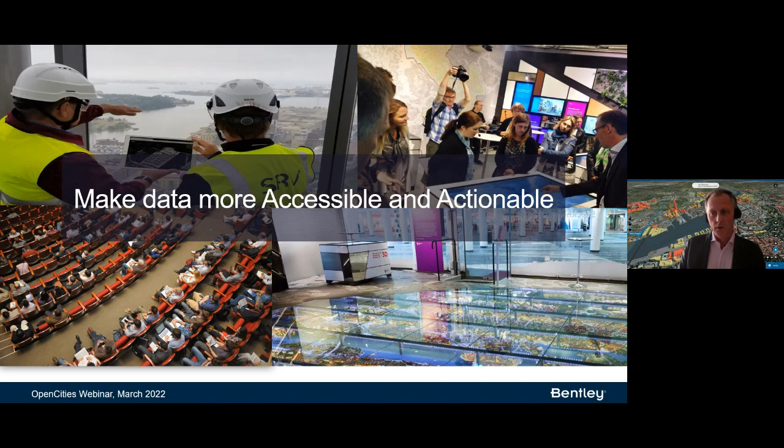So when we talk about the urban digital twin, it's very much about giving this portal, a single view of the operation or the asset you're controlling, if it's a city, a campus area, a smart district, or an airport or a seaport.

To access critical infrastructure data, which could be point clouds for the street or indoor mapping, so indoor scanning of a building, for example, or other types of information.

To also federate data for data-driven decisions, and to implement automated processes and workflows, as well as cooperation with key stakeholders. Next slide, please.

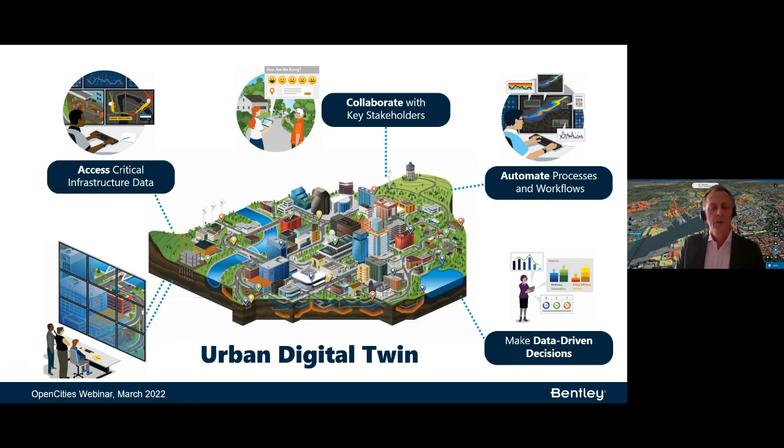So when we talk about the digital twin, it's very much about creating this virtual version of the operation or the area you want to control, not only the GIS information, the mapping information, but also the engineering information.

The CAD models of the buildings, the CAD models of tunnels or bridges, and other assets, but also the associated documentation.

Related to the different components, the analysis, the tracking, etc.

But also the more operational aspects of work orders, maintenance records, and inspection records, as well as the actual status with IoT sensors and feeds, etc.

And we are covering, and this is very much federated in our solution, from different sources in different formats.

So we are supporting common market formats, including also non-Bentley solutions, of course, and IFC and other formats for the BIM models, but also capturing techniques for survey data.

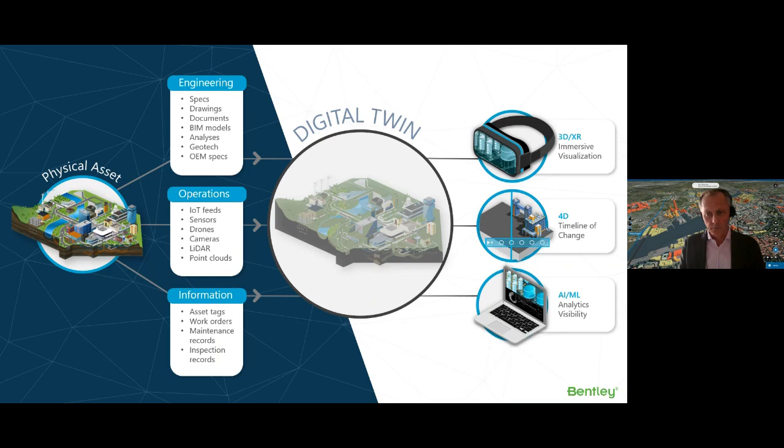So in summary, the OpenCities platform is very much about creating the single view of your city, campus, or asset - the digital version of it. It streams unlimited types of data that you can connect into the digital twin: reality data, GIS data, engineering data, IoT, etc. It's scalable and easy to use and deploy. The user interface is customized to be easy for any user to consume and find data in a nice way, and this is the flexibility we provide with the OpenCities platform.

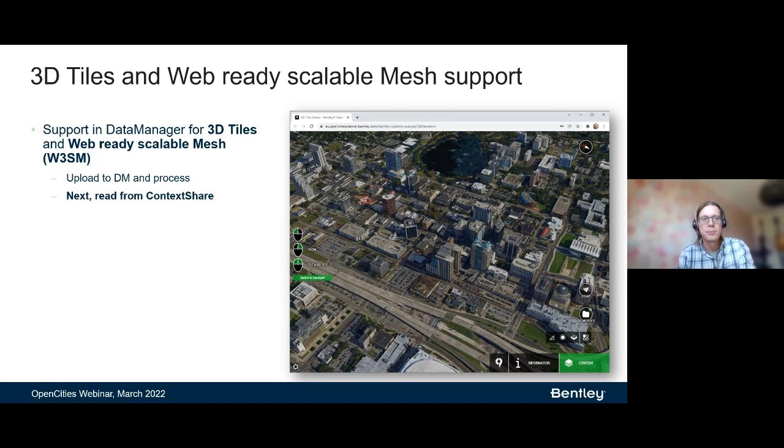Staying in Data Manager, we have added support so you can see what files a source was made from, and also which map data set or sources that this source is used in. For instance, you might use a feature for clipping or masking in another source - this will be listed now if you go to the information section of your source. And of course, you will also see which map data set uses this source. This helps users who have a lot of content within Data Manager and might not be completely certain what is used where and what it was built from.

One major improvement we have done is to implement an ad-hoc workflow to create iModels. This means drag and drop support of CAD and BIM models directly into the editor. Irma will talk more in detail how this workflow actually works later. But basically this is done by connecting one or several OCP projects to a Bentley Connect project. It's still possible to have a pure OCP user experience, meaning you can configure everything from OCP - you don't have to switch to another workflow or user interface, which was the case before.

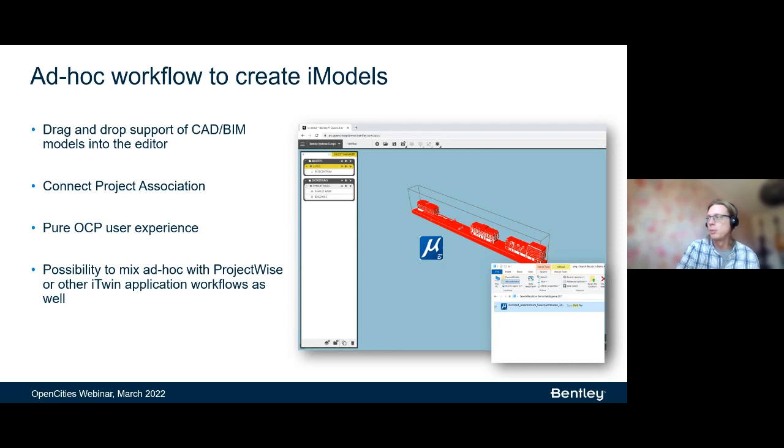This connection to a Connect project also comes with the additional benefit of enabling centralized user management for complex OCP projects. When we look at something like the Sydney Airport implementation, that is a single landing page for the users, but in reality, it's really the sum of 30 or 40 different OCP projects that are connected and linked through landing pages, through portals, and then through projects.

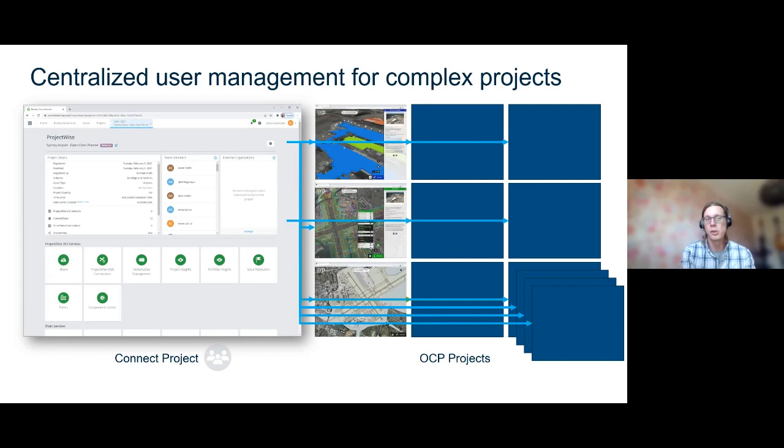The legacy way of doing user management in OCP would mean that if you want to add one single individual to this complete solution, you would have to go into every individual OCP project and add that person over and over again. But what this Connect Project Association enables is that we can take the individual user management out from the individual projects, and instead bring it to the Connect project, where you add and remove individuals who can access things.

You still have control within the individual projects over which group of people can access them, but this is now done through role-based access. You can manage the roles through the OCP interface, or in the Connect project interface. For instance, you can create a role called engineers, and in the Connect project interface, assign who gets to be in this role, then in OCP assign which projects the group engineers should have access to. Irma will go over this in more detail later.

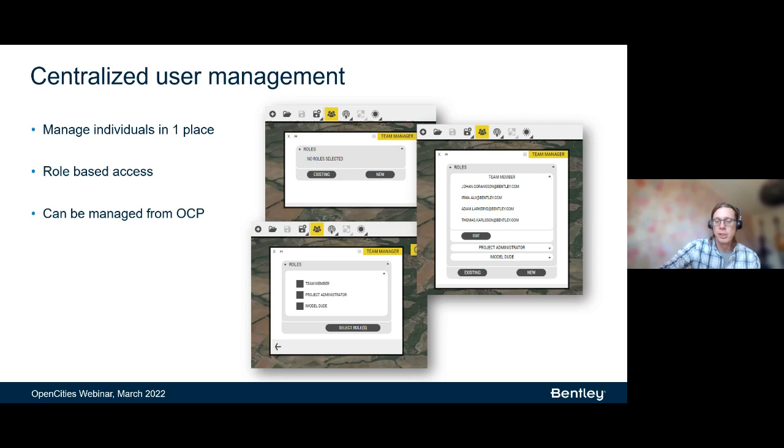So that's the current state. A quick look at things we're developing right now. The ad hoc workflow currently in OCP creates an iModel every time you drag and drop a new CAD or BIM file. We will add support so you can assign or choose which iModel you want to update, meaning you can create a new version automatically, even with drag and drop. From that iModel, you can go back through the versioning, back up a version, and have 2 or 3 different versions simultaneously in OCP, letting the user switch between them. This helps that workflow and enables versioning of the iModels.

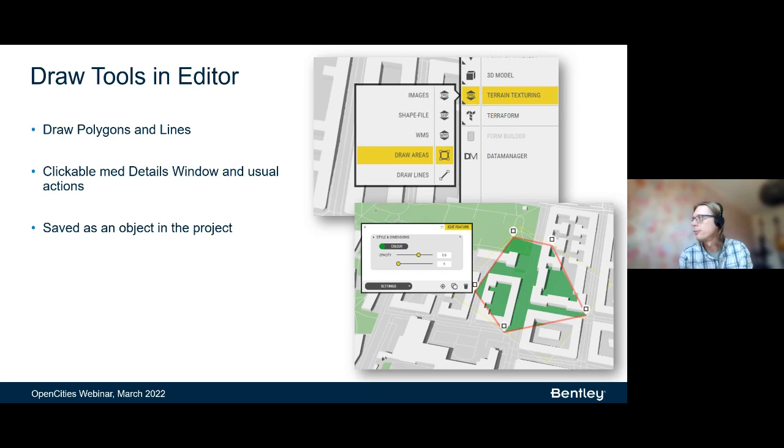Project content will also be searchable. So if you've created a lot of points of interest manually, you can now enable them to be searchable, and this will search the name of the point, the label if you've given one, and the details window content. Same with 3D models and the drawn features I just presented. You can make them searchable without going through Data Manager, automatically, with a simple checkbox.

Some improvements to the TerraForm tool as well. We've improved how the nodes are drawn. We had seen some problems where the way the nodes were presented made it difficult to use the tool, but that's been improved. You can also now add and remove nodes from the polygon that you drew before.

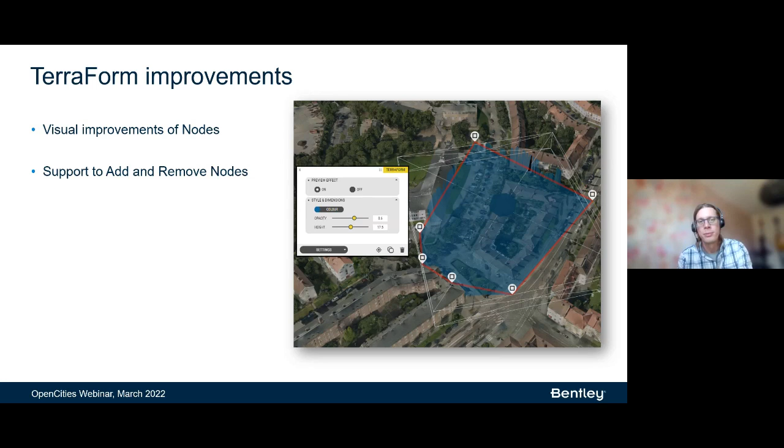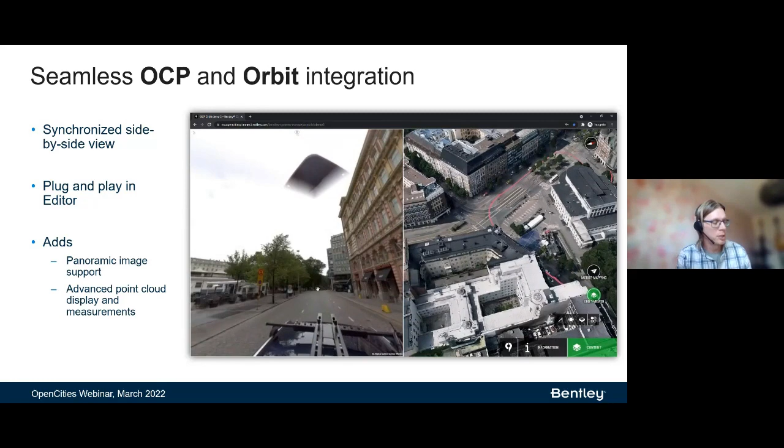Another thing we are working on is a seamless integration between OpenCities Planner and another Bentley product, Orbit. This allows a synchronized side-by-side view with OpenCities Planner and Orbit. Orbit is a tool that does a lot of things, but it manages and visualizes panoramic images like we see here, point clouds, and also reality models.

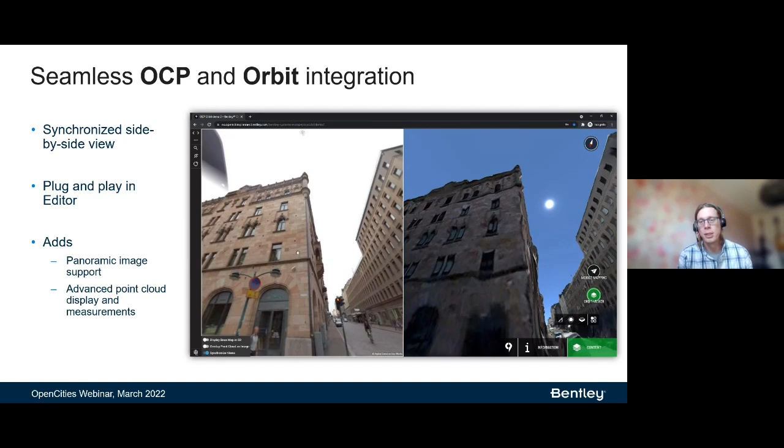It has more advanced measurement tools and annotation tools than OCP. But with this integration, you can now get the best of both worlds. It's going to be plug and play in the editor, so no scripting. You just pick the Orbit publications that you have access to.

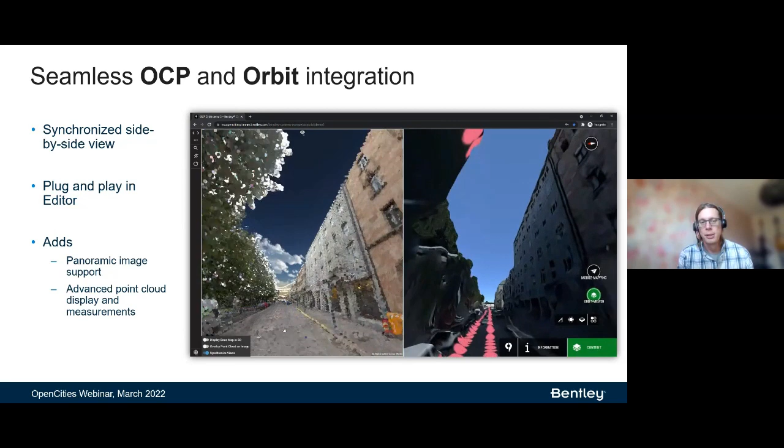You add it to a layer button in OCP, and this is the end user experience. I think this is adding a level of data support that we don't support, or didn't support, in OCP standalone. It's really a synergy effect between these two products now.

That's it for me, and I think I'm going to hand it over to Irma to dive deeper into the iModel and user management workflows. Thank you.

Hi everybody, so I'm just going to share my screen. I have a video prepared, and I'm going to go through the workflow of how to add iModels to OCP. But before we dive into that, I just wanted to briefly bring your attention to something that was mentioned in the beginning of the webinar, and it will be mentioned again at the end. So I'm talking about the newsletter.

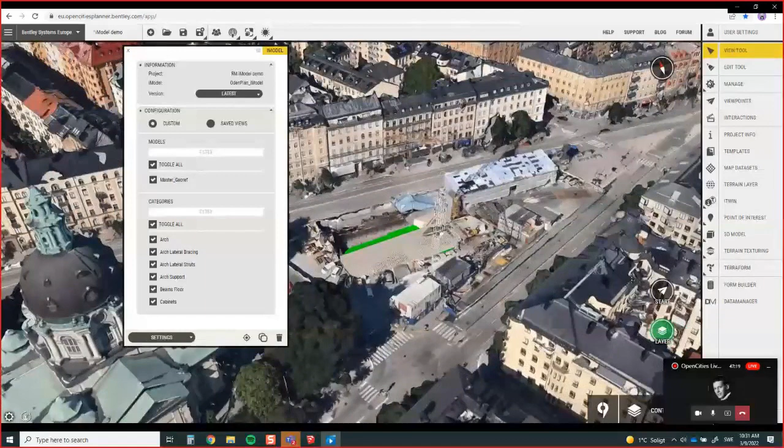And we get this settings window - I'm guessing you have seen that before. Navigate to object, pretty standard button so far. You get the list of categories or layers and the list of models that are inside of this iModel. Just a quick reminder, you can of course have 15 Revit files in your iModel if you want to, and these will all be listed here.

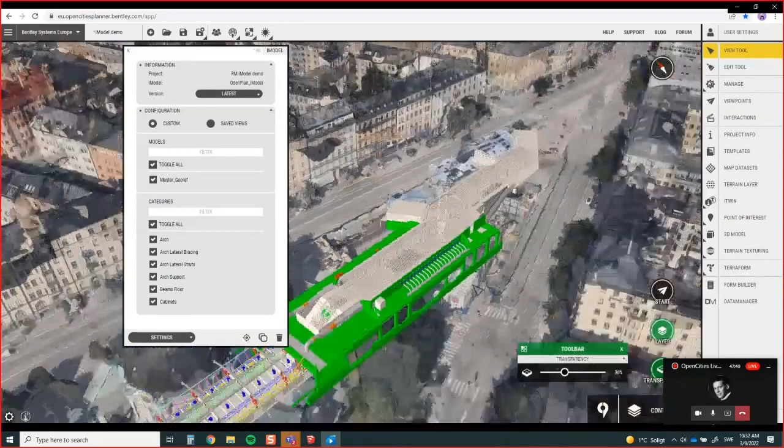Okay, so I'm showing that the iModel has been added here, toggling the transparency to see what it looks like underground.

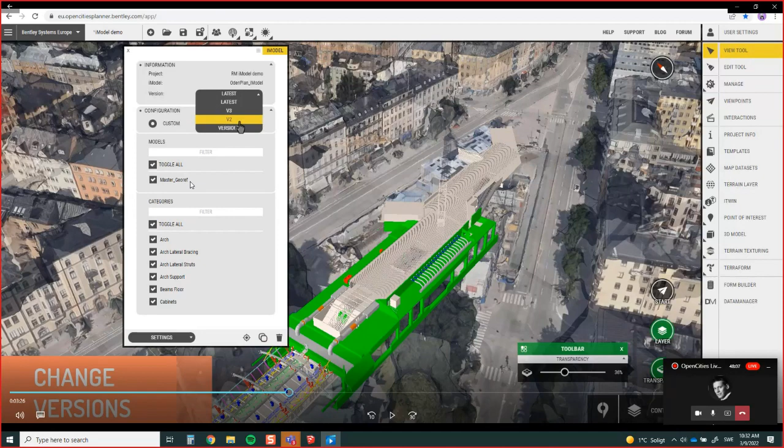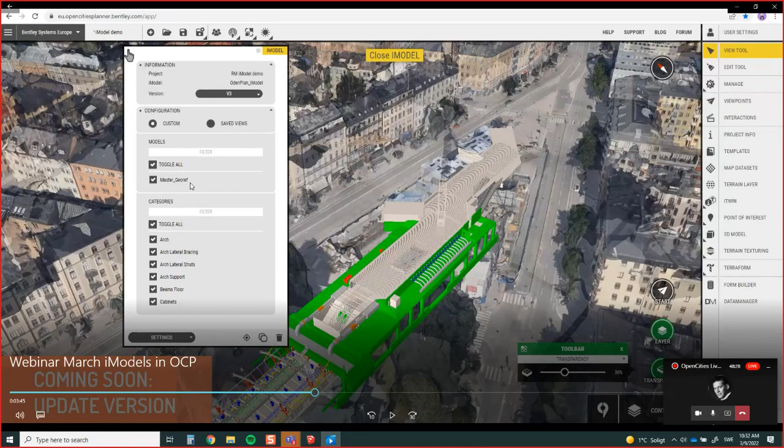Another thing we've changed in the last release is that now you can select the version of your iModel directly from the iModel settings. Before, you had to re-upload your iModel and select the version each time, meaning you had to delete the iModel and re-add it with a different version. Now you can just change the version directly from the settings. It will tell you that you'll lose your configuration - if you had saved views or specific layers toggled on or off, those will be lost. But that's how you change the version of your iModel.

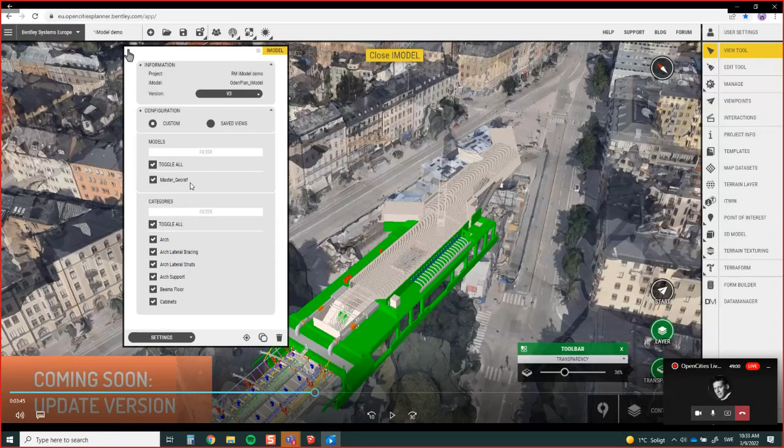What we still don't have support for, and what Johan mentioned, is coming soon: the option for you, once you've created your iModel in OCP, to update it with a new version of that same iModel. That's under development, releasing in our next release. With that, you'll be able to drag and drop into that same iModel you've created and update the version. So that is coming.

Save the project, of course, as many times as possible.

Now, very important topic: deleting the iModel. There's a difference between deleting an iModel in OCP and deleting the iModel in Connect Bentley. Both delete buttons are accessible from your OCP interface, but it's important that you understand the difference.

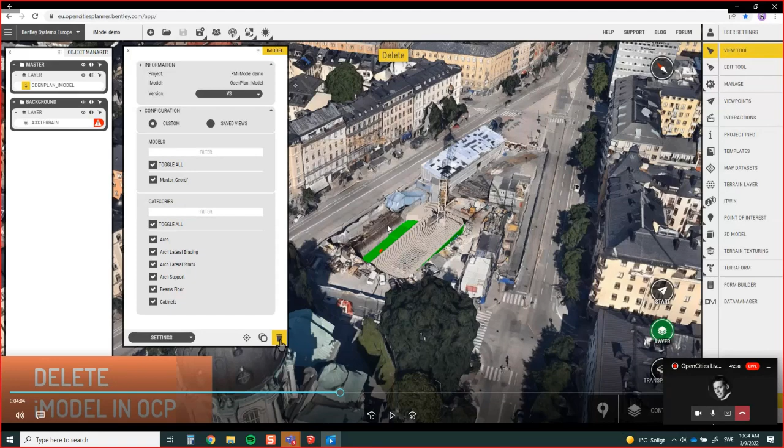If you go to Object Manager, you find your iModel inside a layer. You click on it and see the settings window. There's a delete button like we have with all our 3D models. If you click on it, you delete that iModel from your OCP project, but your iModel will still be accessible in the iModel settings, in the list where we have the iModel. So it's still there and you can just re-add it by clicking on it again.

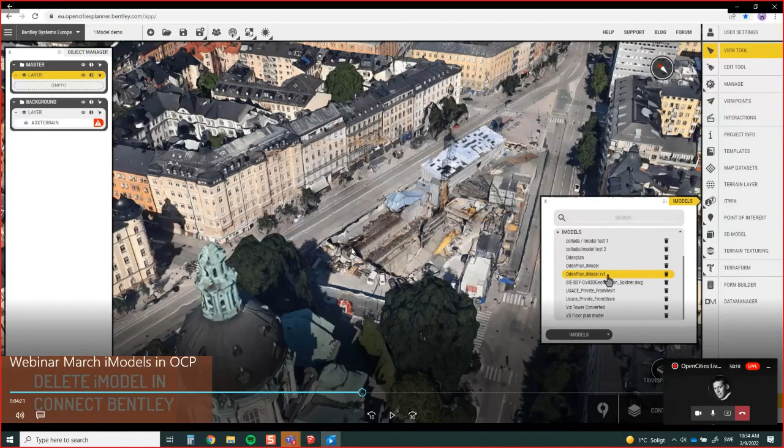But what happens if you decide to delete that iModel from Connect Bentley? This is a different type of delete. If you delete it here, this will delete it from your Connect Bentley portal, which means you cannot re-add it - you'll have to drag and drop it all over again and reprocess it to see it here on the list.

The danger here, and our goal, is that you as OCP users use one Connect Bentley project and store all your iModels inside there, then access that on several OCP projects. So I might have one Connect Bentley project with, for instance, 3 iModels, and use those 3 iModels in 20 OCP projects. If I delete my iModel from the Connect Bentley, that will be deleted in all 20 projects it's been used in.

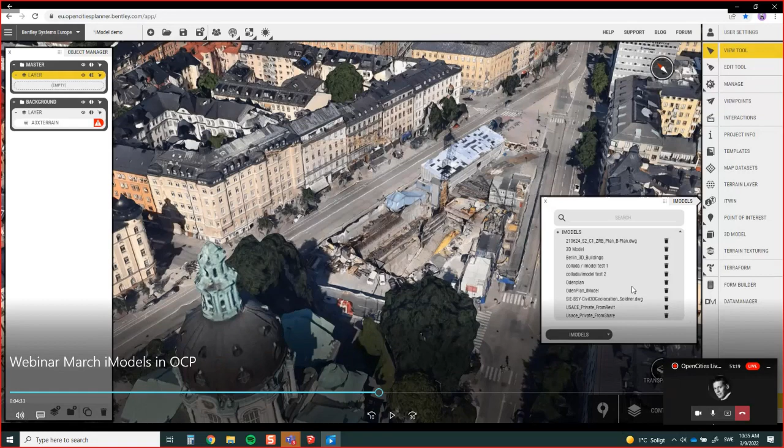So that's something to keep in mind. You can delete it from your project and it will not affect anything else. But if you delete it from this list, or from Connect Bentley directly, it will affect all of your projects that have that iModel inside of it. So be mindful that these things are connected, and it's not just one project connected to it, it's multiple ones.

Okay, so again, save - you can never save enough.

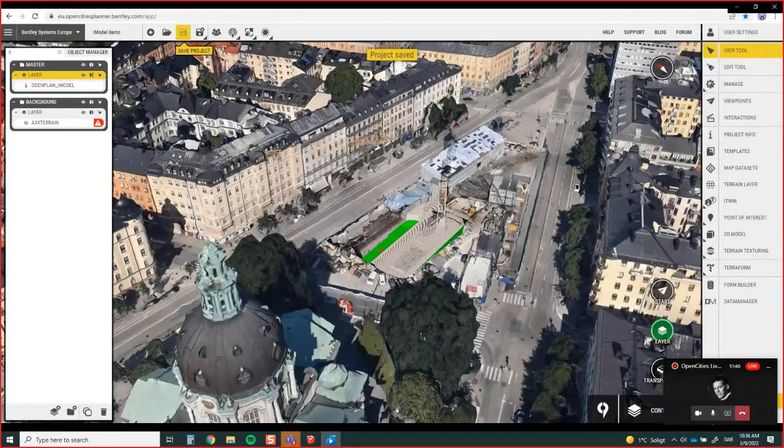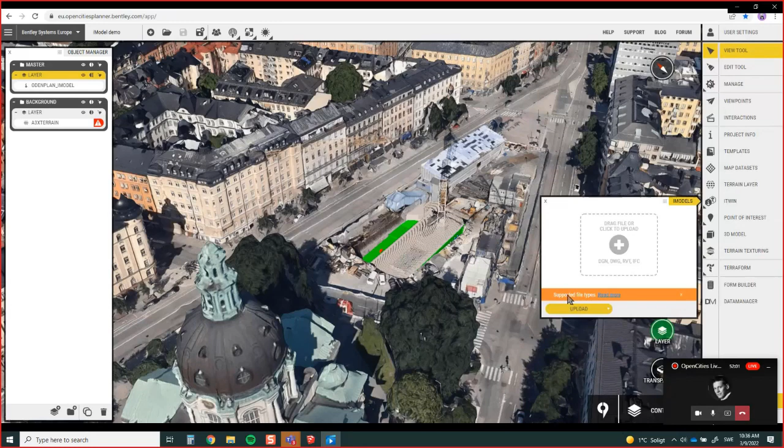Now I'm just explaining again where these settings are. The first button was settings - this is where you link and unlink. The second was iModels - this is where you drag and drop your iModels or reach all the iModels already in that Connect Bentley project listed for you. We also have a shortcut to the supported file type; if you click on that link, you'll see documentation explaining which file types we support.

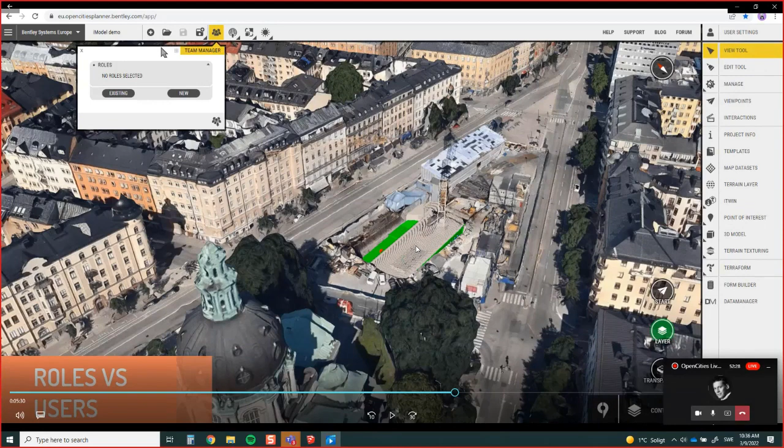Chapter 2, the users. This is something very complex and new, and I have to come back to what Johan mentioned already. What we wanted to do here was create some kind of synchronization of users from OpenCities Planner to that Connect Bentley portal, not just to connect for various reasons - one being that if a user is not added to that Connect Bentley portal, they cannot see the OCP projects. This may not be necessarily useful information for you, but it's the reason why they have to be connected.

Another reason is, same as what I explained for the iModels, if you have 3 iModels in Connect Bentley, you want to use them in 20 projects. We wanted to do the same thing for users. We wanted you to store your users in Connect Bentley, say 10 users, and then use those same 10 users in 300 projects, regardless of the number of projects you have.

Then you can have a centralized user management system so that once you change one thing, it reflects in all the other projects. You don't have to do any additional manual work. But for this to work, you have to be very mindful that every delete you do affects other projects as well.

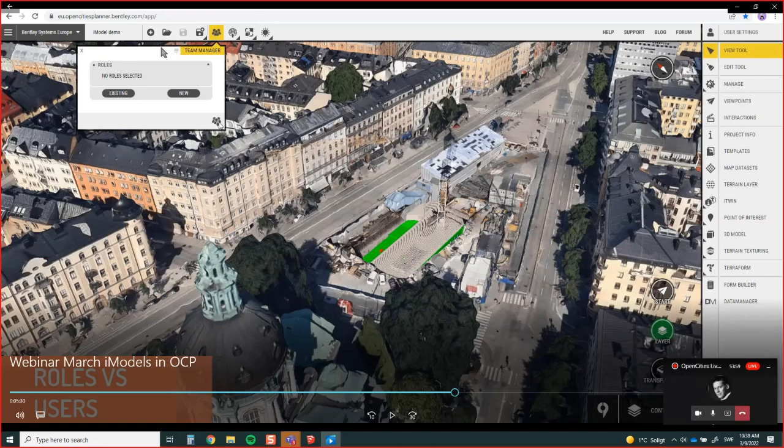So what changed here? You're aware by now of the team manager setting, and you probably noticed this dialog button changed. This does not change in regular OCP projects that are not linked. Only when you link your OCP project to a Connect Bentley project will this team management setting change.

And it changes into roles. Roles is a new concept to all our users. Roles is the way users are tagged in Connect Bentley. So how does this work? You can either create new roles or select existing ones.

I'm going to switch now to Connect Bentley so you see what these roles look like. If I click on existing roles, I already have some roles defined here. And if I go to Connect Bentley, I'll show you how these roles look there.

Each user can have one or multiple roles. They always default to team member when first added, but then you can change or remove that as you wish. You can add users or create new roles here in Connect Bentley.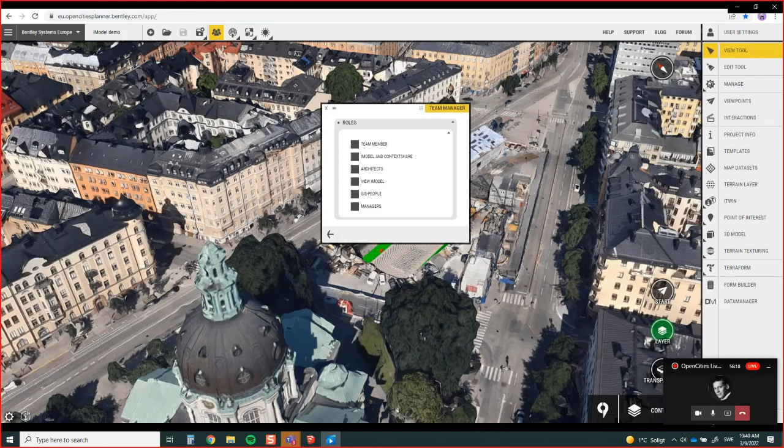So if you're doing this from Connect Bentley and giving specific roles here, be mindful you don't trigger additional payments. But if you're doing this from the OCP side, creating a new role, none of these settings are ever touched, so you don't have to worry about that.

So I'm showing that a team member I've seen in OCP exists as a team member in Connect Bentley. I'm going to select all the team members. So I'm selecting a role, and this will download all the users that have that role. Just be mindful if you're going to test this out.

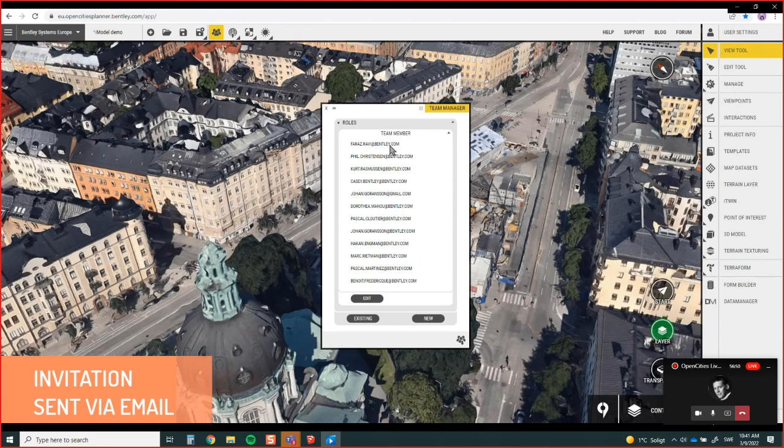Everybody now receives an email invitation once I add these users, letting them know they've been invited to this project. So don't test this out with stakeholders or anything like that. Now you see the list of everybody tagged with the team member role.

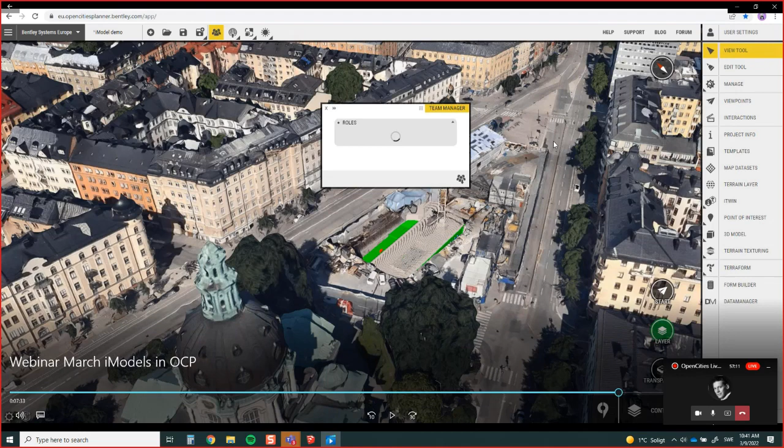And here I create a new role. Like I said, if you're doing it from OCP, you won't trigger any new expenses. You're just creating a simple OCP role that allows your viewers to view the iModels you're adding to the project. Now I have two roles added, and the new one I created has no users, as you can see.

So what I'm going to do here is edit this role. I can add or remove those users directly from OCP. I don't have to go to Connect Bentley. I'm just showing what it looks like in Connect Bentley so you understand it a bit better, but all of this workflow can be done just in OCP.

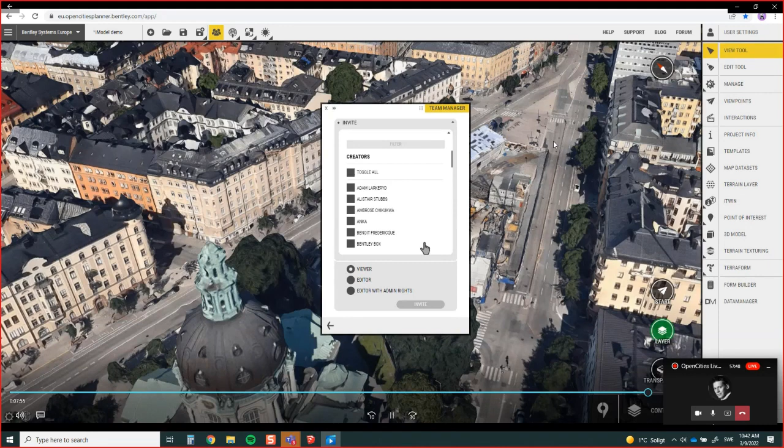So what I did here, I clicked on edit and then clicked on invite. Now I have a list of everybody I can invite into this role. I can choose whether they are a viewer or an editor with admin rights.

So these are the access rights that you've already known and used in OCP, and they work the same way. If I'm adding this person as a viewer to my project, they can see all of my iModels and they can see my project, but they are not editors. They cannot edit anything or break anything in the project. Or I can select the user to be invited with admin rights, which means that person has complete control over the project.

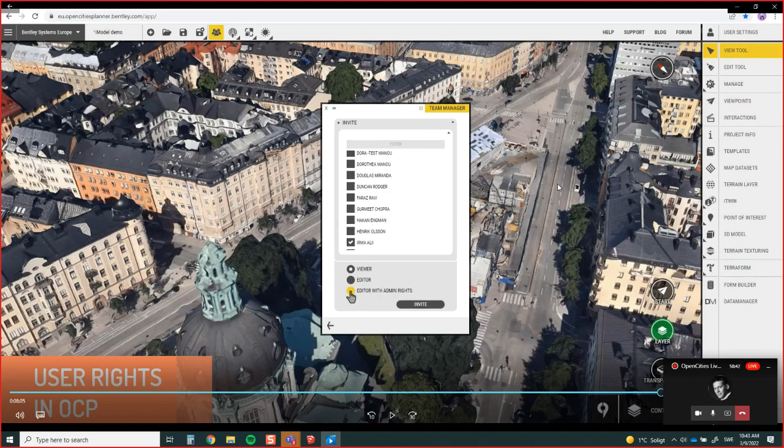Bear in mind that you cannot invite somebody that hasn't already been added to your instance. So if you want to add another user and see them on the list, you first have to add them to the instance. Have that in mind if for some reason you don't see your users here on the list.

Okay, so I am choosing an editor with admin rights access for myself and then clicking invite. Now I'm going to show the workflow to delete a user. Again, we have two roles that contain users, and if I click to edit a role, I can either invite more users or manage the users already there. I can change the user from an editor with admin rights into a viewer, or I can delete that user from here.

The same as I said with the iModels, this is important to understand. If you remove this user from this role, it means the user will be removed from Connect Bentley as well. If you've created 300 projects and added stakeholders into 300 of your OCP projects connected to that one Connect Bentley project, and you enter one of the OCP projects and remove anybody from the stakeholders role, that person will be removed from all 300 projects.

That's kind of why we are doing this. You can add a user to your stakeholder role and they will automatically be added to 300 OCP projects without you having to enter each one manually. This will all happen automatically. So that's an advantage, but it could be very destructive if you forget that you're removing this user not just from this OCP project, but from all of them. Just bear that in mind when adding or removing users.

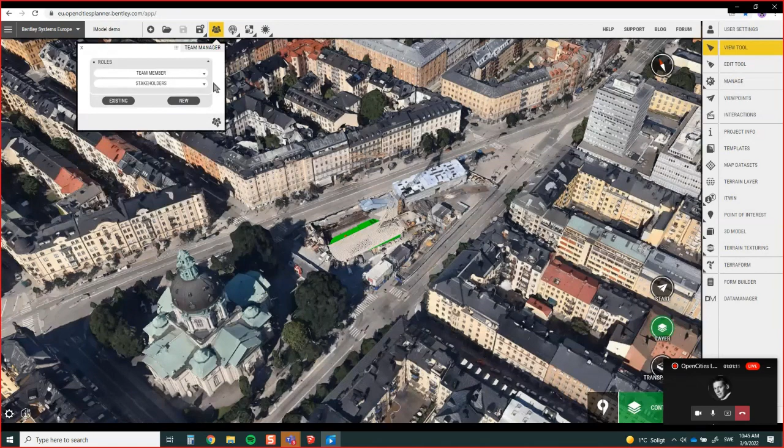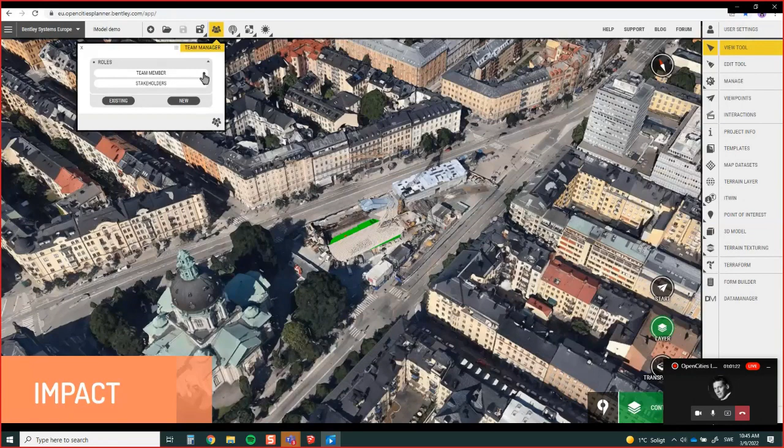Yeah, this impact part is just a tag for me to do all this speech about being mindful.

We still don't have that much feedback from our users. They started testing since the last time we released this. We're hoping now with the drag and drop, this will become 50 times easier and more user-friendly, and hopefully our users will start using this more and more. We're very appreciative of your feedback, so anything you have as feedback on this workflow, please let us know if it works well, if it's intuitive. Please reach out to us and let us know. I think with that, I'm done.

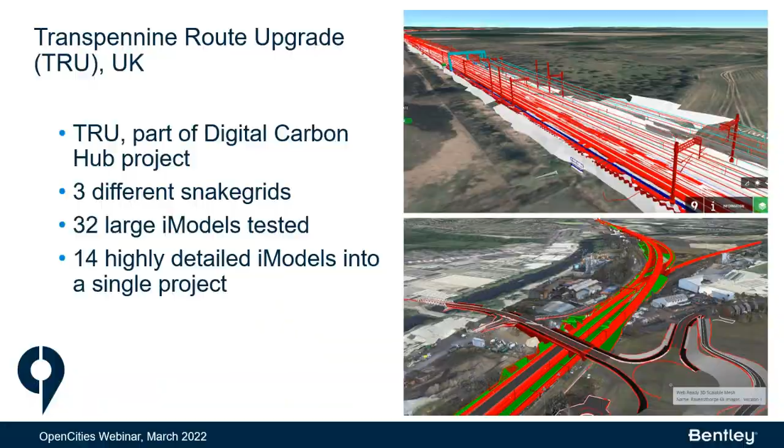To begin with, we have prepared a few project examples, showcases for today that I would like to show you. The first project is the TransPennine Route Upgrade, TRU for short. This is an aspiring rail project in the UK, and it's part of a bigger digital carbon hub project that the customer is preparing. The iTwin team reached out to our OpenCities team so we could help with the customer's primary goal, which was to identify if models with different snake grids, low distortion coordinate systems, could be referenced together.

The challenge here was that we wanted to check if multiple highly detailed iModels from 3 different coordinate systems could be federated into one unified scene. During the test, we managed to bring over 32 large iModels into one OpenCities project scene, showing that OpenCities can support large-scale projects. The project now consists of 14 highly detailed iModels from one Connect project, but we have the availability to connect with more Connect projects and federate more iModels. So this is a good example of the capabilities that OpenCities offers to large-scale projects.

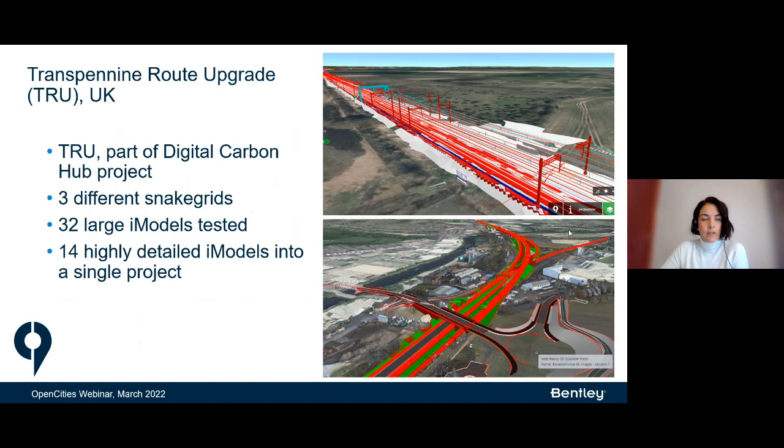The next project is the Hobart City project in Tasmania. This is an example of how an OpenCities user started without a clear goal in mind, but along the way they started exploring and implementing the capabilities we offer. The user started with a reality mesh model from the city, and along the way they experimented, and now they have connected to a feature server and bring live data from cameras installed around the city for monitoring and surveillance, and also for parking spaces where they can check capacity.

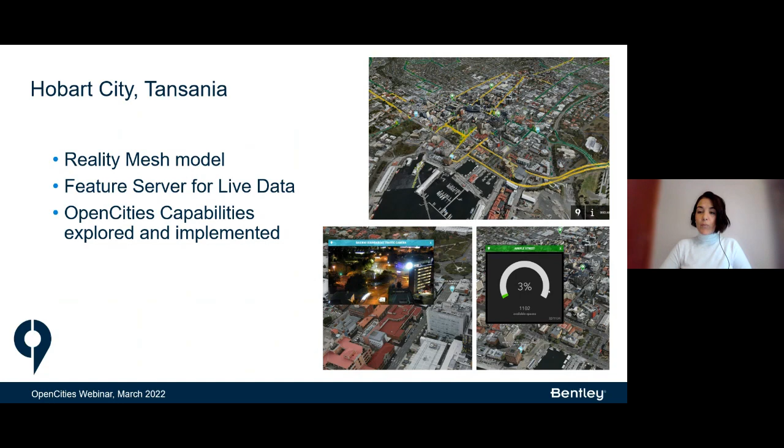Next is the Sydney Airport project. Sydney is one of our digital twin campus users, and this project serves as a solution that shows how feature-rich a solution using complex data can be. The project is being handed over to 30 internal users so far and will eventually roll over to around 600.

In the project so far there has been integration of different types of data. The user has asset and infrastructure information from spatial databases, reality meshes and point clouds. There has been integration of engineering and BIM data, and also integration of, for example, financial data from an Oracle database. We have been working on a use case video with them, and I wanted to share that with you so you can see how advanced this is.

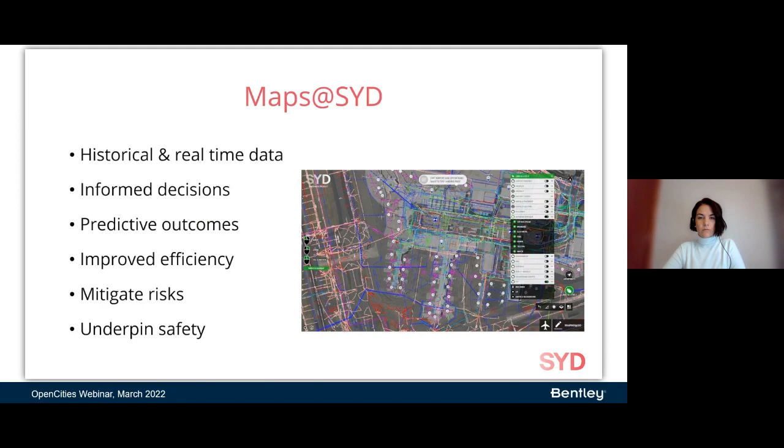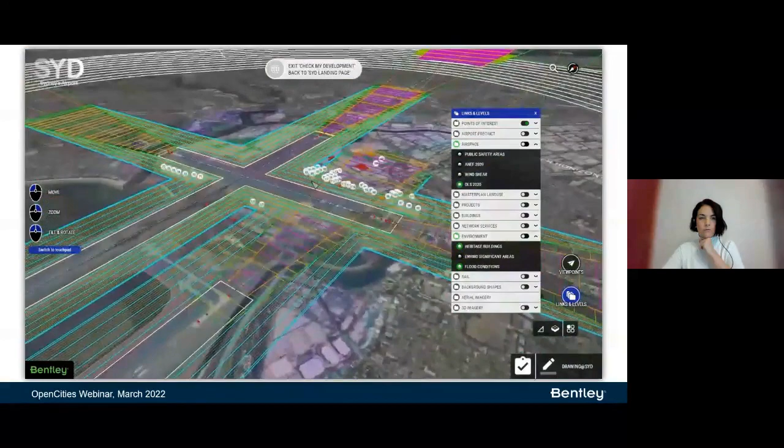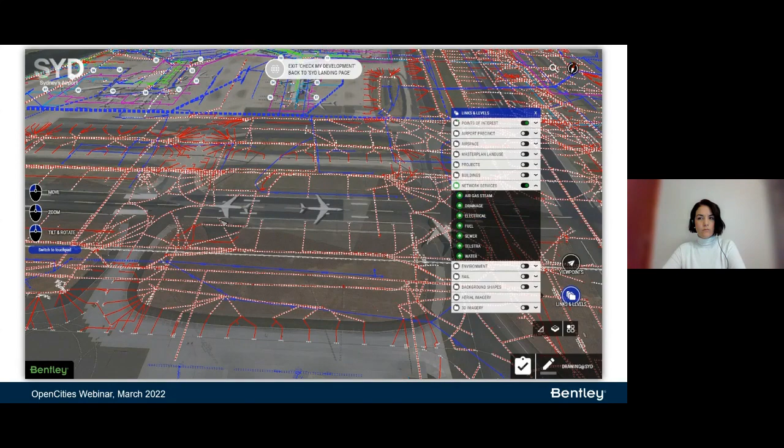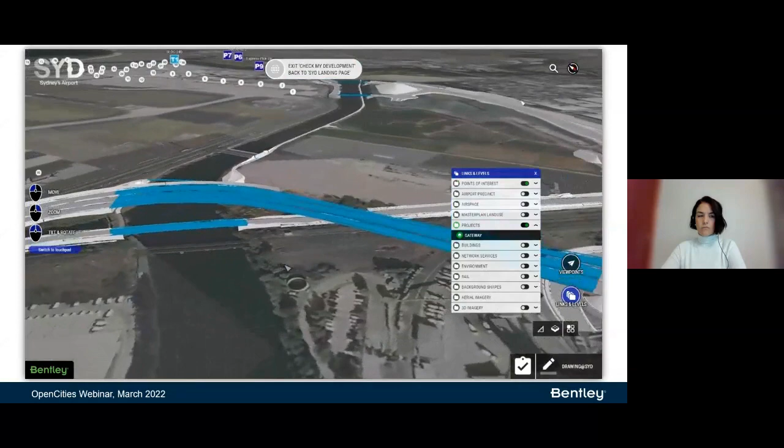The Sydney Airport OpenCities digital twin, known as Maps@SYD, is a gateway to historical and real-time data from multiple sources relating to our physical assets, enabling our people to make informed decisions, facilitate predictive outcomes, improve operational and asset efficiency, mitigate risks, and underpin safety. The landing page enables a diverse range of users to navigate their way around the airport, finding information specific to their department and role, whether that information be within buildings, terminals, across the airport precinct, or details on projects and developments. The Check My Development site is to aid in the transparency of projects and future developments across the entire airport precinct. Project managers have the ability to overlay flood studies, environmentally significant areas, and heritage sites that may impact their development. Operational information, such as the Airspace Obstacle Limitation Surface, the OLS, and noise contours, can also be turned on. The location of the in-ground services network is essential. The ability to turn on or off individual services creates an overall picture of the impact a development or project will have on the existing infrastructure, essentially creating a dial before you dig scenario. Historical images can also be displayed using the slide timescale. Prior to the implementation of Check My Development, project managers would utilise our digital print room, downloading multiple static PDFs and piecemeal them together to tell the story, often followed by requests to the spatial team to create an overlay view of the proposal. The ability to view all projects and developments airport-wide negates duplication or overlapping of projects. With the aid of OpenCities and the Check My Development site, project managers have the ability to choose their own adventure, saving both time and resources.

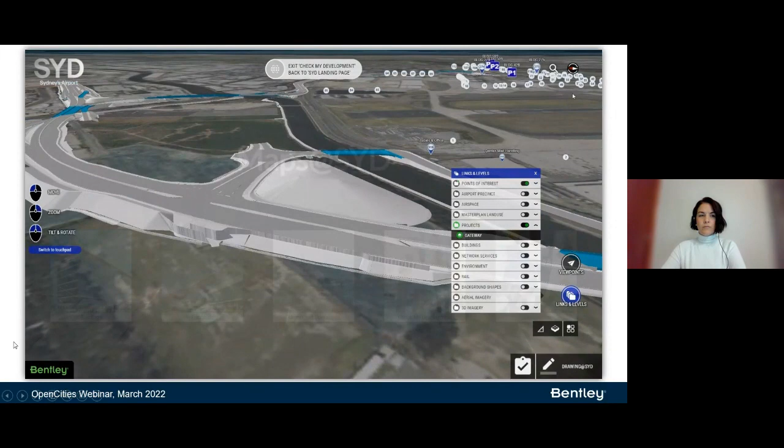So, Sydney Airport, I hope you find this as interesting as we did.

Moving on to the last project we want to share with you today is the Port Authority project in New South Wales, Australia. This project also follows the landing page, themes, and portal structure. Port Authority has been handling all the major ports in the region, and one reason they wanted to use OpenCities is because they understood there was a critical necessity for sustainable management of their ports. Among the ports they have been handling is Newcastle Seaport, one of the world's largest coal export ports, with a major economic benefit not only to the city and region, but the whole area.

So asset management was implemented through OpenCities and the port authorities, so how they can use asset data for different sectors of the port, and this facilitated them in critical decision making and also improved the performance of the assets on the port.